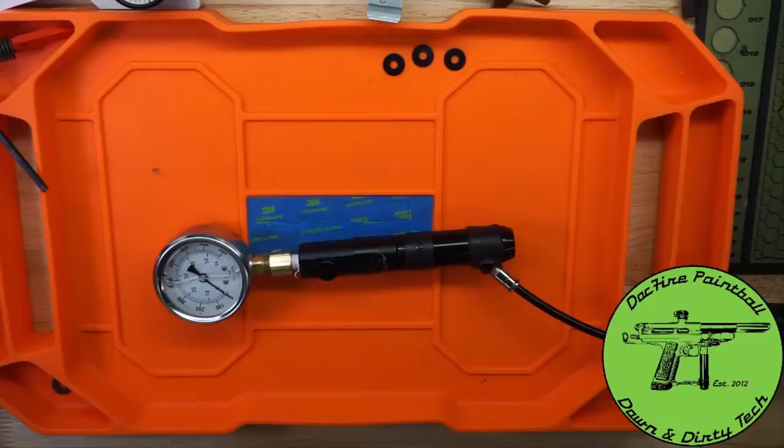I'm back with the Dye reg here. You see, these Dye regs, at least the first release of them, are being shipped with the low pressure spring pack in them. So that's what's in here right now, and I'll show you what the pressure range is with this.

I'm using a Ninja tank that's set right about 825 psi. Right now this is all the way off, so I'm at a 0. It actually has a little air going through, you can hear it. All right, so this reg has settings in it where the adjuster has stops.

So I can go from 0 and there are stops, and it's going to max out right there. I can't go any further. And it maxes out right about 220 psi if I get in there.

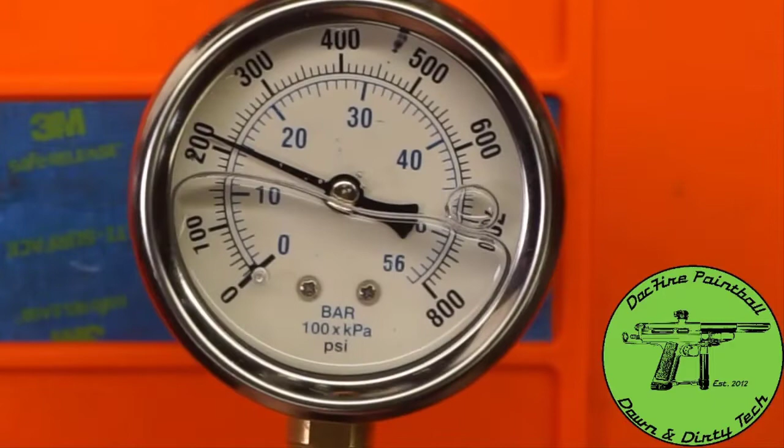Actually, let's just zoom in with the camera. 220 psi. Sorry about the oil fill, you see it refresh there. So let's back out here.

What we're going to do is we're going to change out this spring pack, all right? So let's degas it.

I'll probably fast forward through a lot of this. Take off the Dye reg tester, modified. Just pull it off the tank one down here, it's easier. All right, so we're going to take off the top cap.

Oh, and right here are the 3 factory dye Belleville springs that will make it go to a higher pressure. Let's tap out the spring pack, and I'll show you. There we go, let's set that right there.

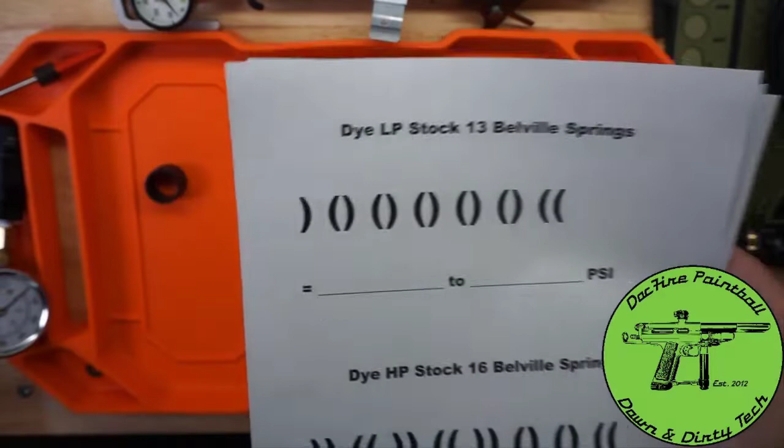Let's bring over this guy right here. So the current configuration, let me get a better pen here, goes from essentially 0 psi to 220 psi. That's approximate, every system will change a little different, but this is the current configuration.

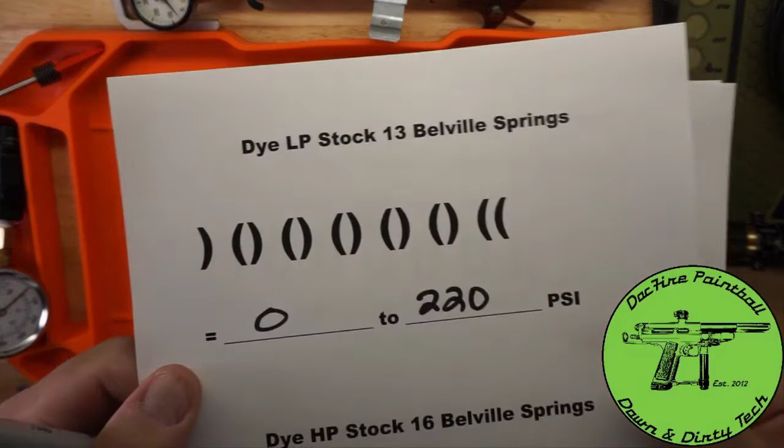This is, if the piston was in here, that's the way the piston's going. So these double stack ones at the end are towards the end of the piston, and this is towards the base of the piston, the fat end.

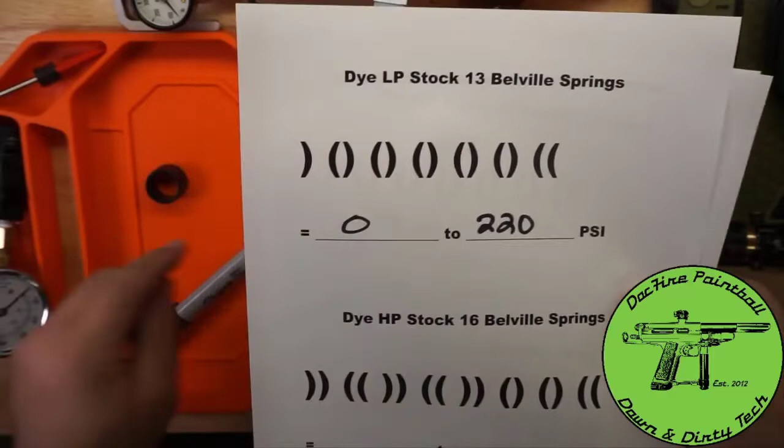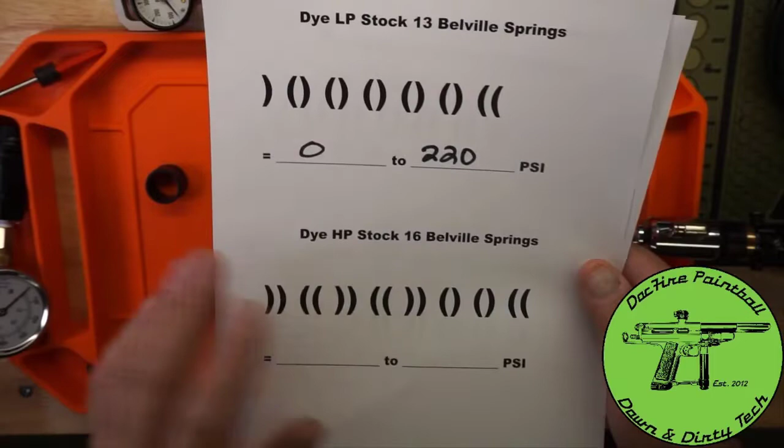All right, and there's 13 Belleville springs in the low pressure configuration. So for you to go high pressure, you need to get 3 more springs from dye, or I have another option for you. This is the configuration they need to be in, and we're going to put those in there right now and see what it comes out to be.

Let's take these springs off.

With this configuration it's about 180 psi. So we'll put 180, and we'll see what the highest pressure is. The highest pressure, let's zoom back out.

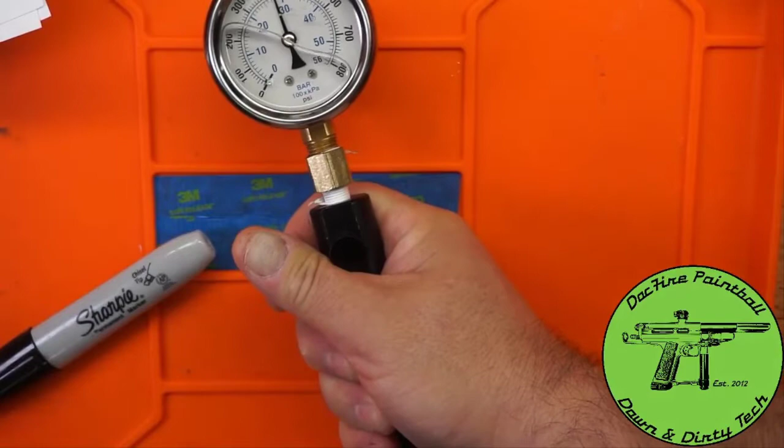I'm going to try to, that means we're going to unscrew this all the way to where it stops. I think it's going to be right around 600 psi. And I'll just zoom it in, it's easier. Sorry guys.

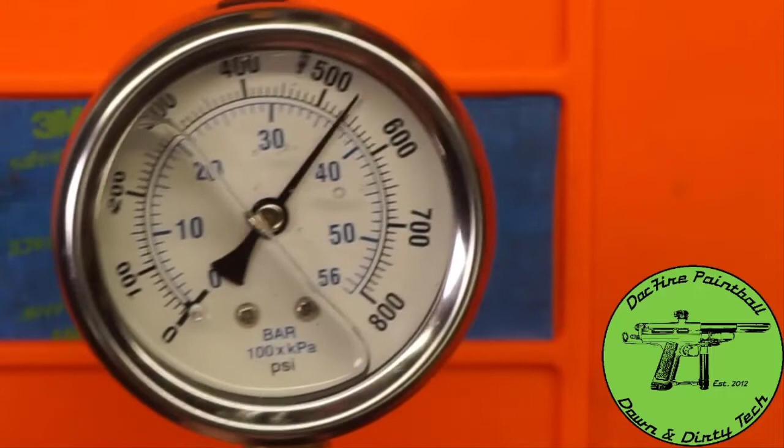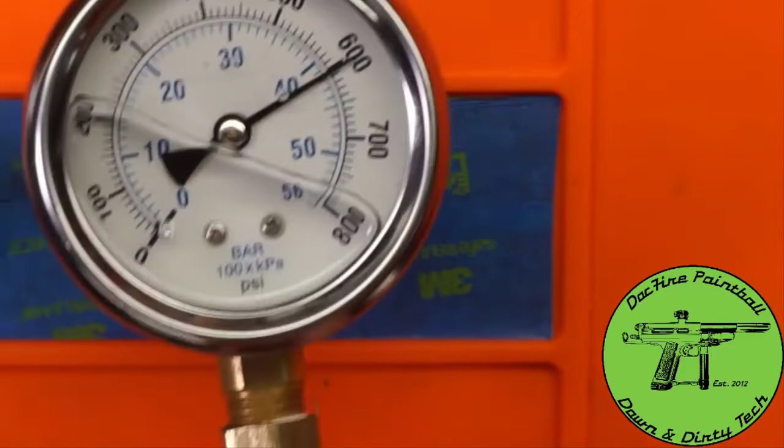And it's kind of slow at 600, that is a really slow response. So, and I like when I'm lowering the pressure, I like to degas it a little bit. It's a little bit easier on all the components.

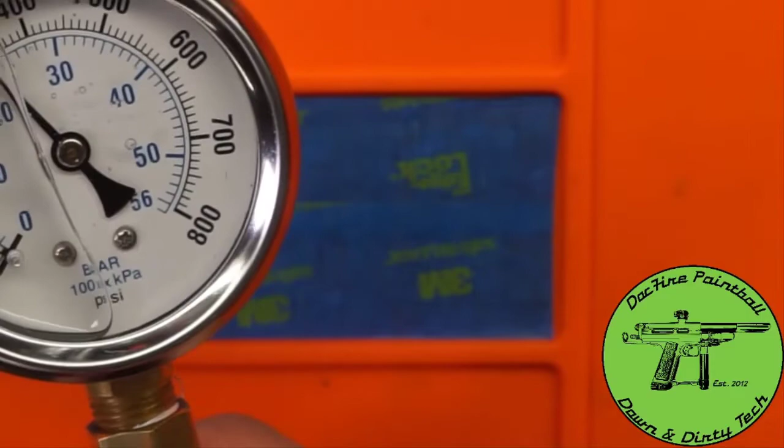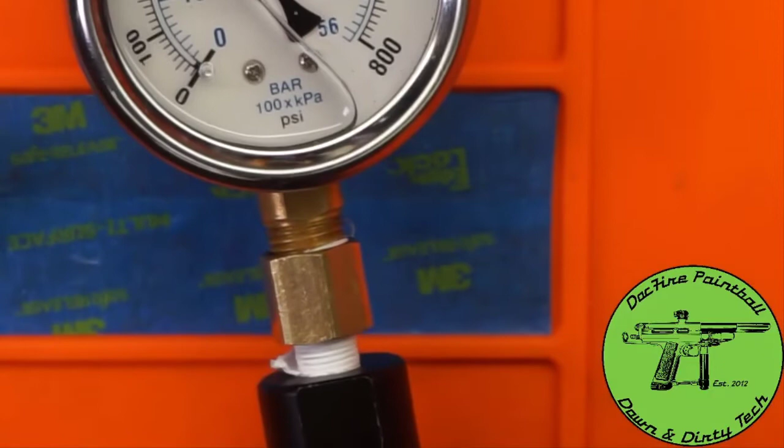But let's say right around that 350 range, that's where a lot of the free flow markers are going to be, give or take. It's reasonably fast. Now this is an oil fill gauge, so you gotta be cognizant of that, that's that oil fill gauge.

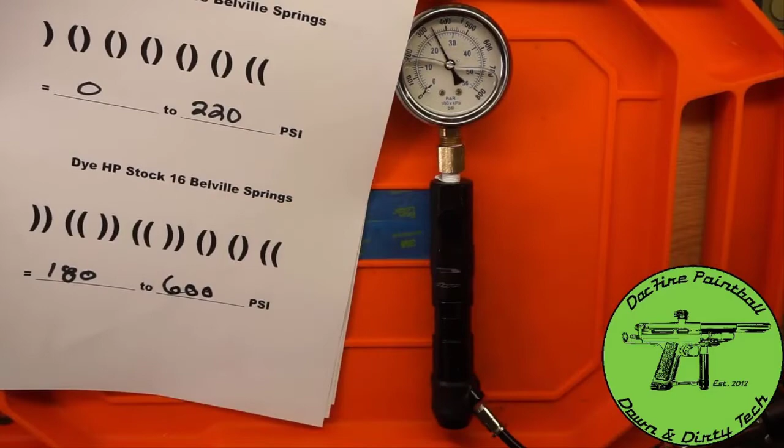So that's the high pressure version. I said it went up to about 600 psi, maybe a little bit over. We'll say 610, we'll just say 600, because the reality is most markers out there are either going to run in this range for low pressure, or this is 180 to 600, and the middle range between 180 to 600, let's say 200 to 600, is right around 400 psi. And so that's the medium range on it.

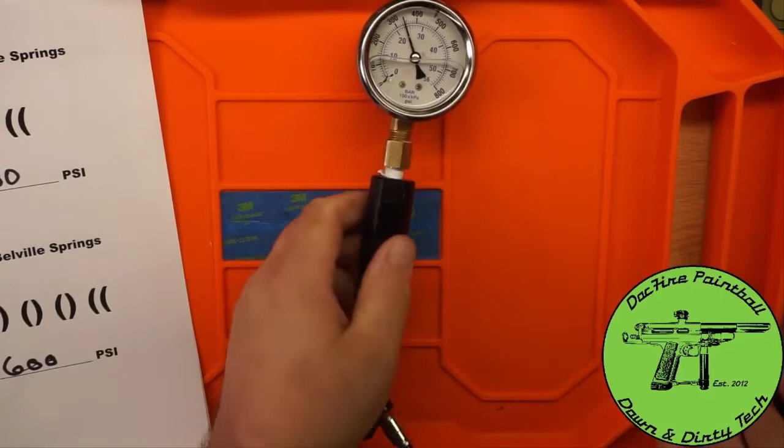So let's see with another option out there. We're going to unscrew this, we're going to degas there, pull that off. We're going to zoom out.

And what I have is a set of DocFire custom made in the USA Bellevilles. And I spec these out, they're special.

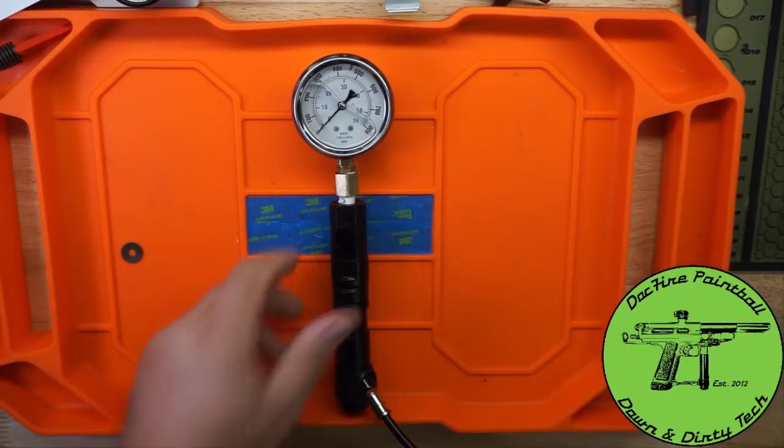Buy these from a US company, and it's not McMaster-Carr. You guys can go buy them off of McMaster-Carr, and good luck. I've tried it - they are different specs, a lot different, so I don't buy from it. McMaster-Carr has great stuff on it, but I don't buy a lot from there anymore. I'm finding that I can go direct to different companies and they have a lot more options. McMaster-Carr really has the standard sizes of things, and not the other sizes. So we're gonna knock this out.

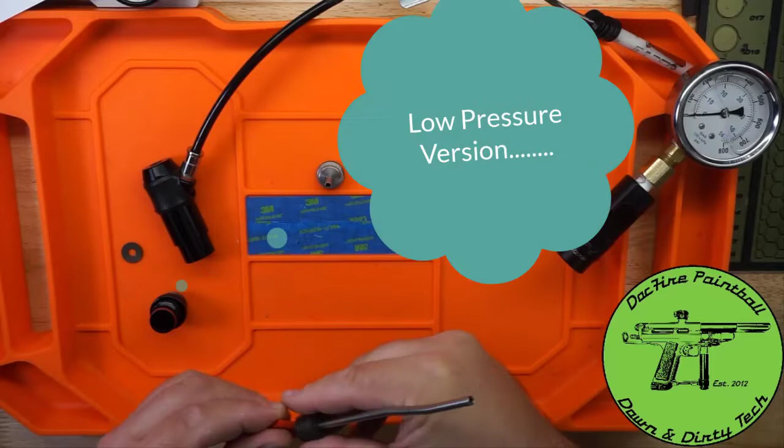We're gonna pull this stack off and put it on a screwdriver so I have it here - I could probably measure a little bit easier that way. We'll set this off to the side, and we're going to put on the DocFire spring stack. So this spring stack right here is 2, 4, 6, 8, 10, 12, 13 discs, in the same configuration as the low pressure version of the Belleville spring. So it goes - we're going to stack these on here, right? And let's do these guys right here. So that's these guys. So we're going to say these are the ones that, I'm going to draw this out.

It's going to be the same as stock - same as stock, 13. Okay, and we'll see what the pressure is on this. So, okay, this one all the way - sure, it's all the way down. Yeah, it's all the way down. We're going to zoom in here.

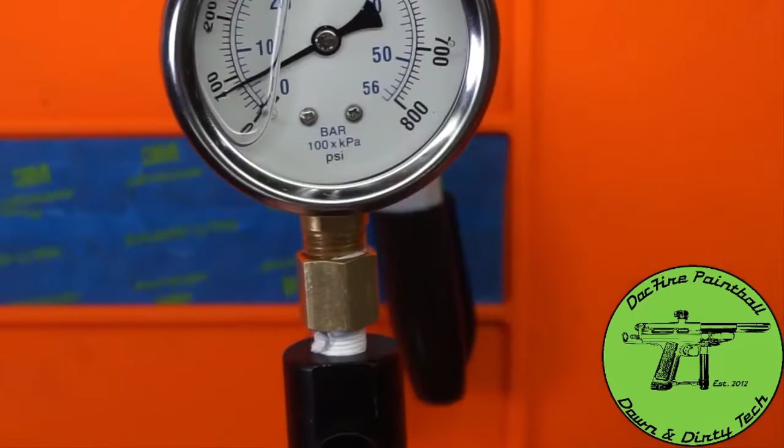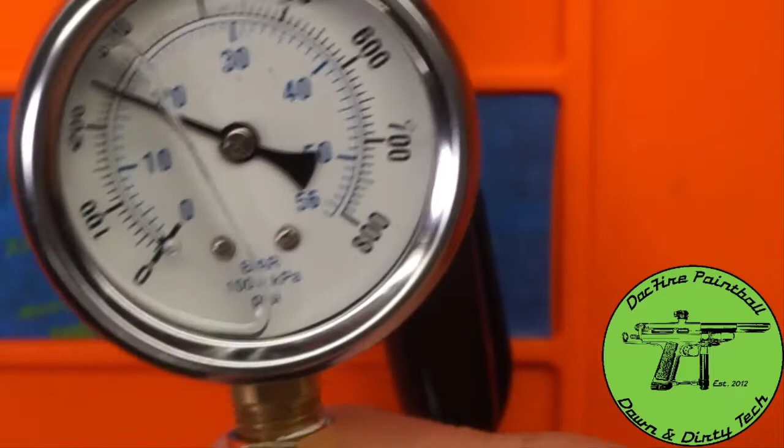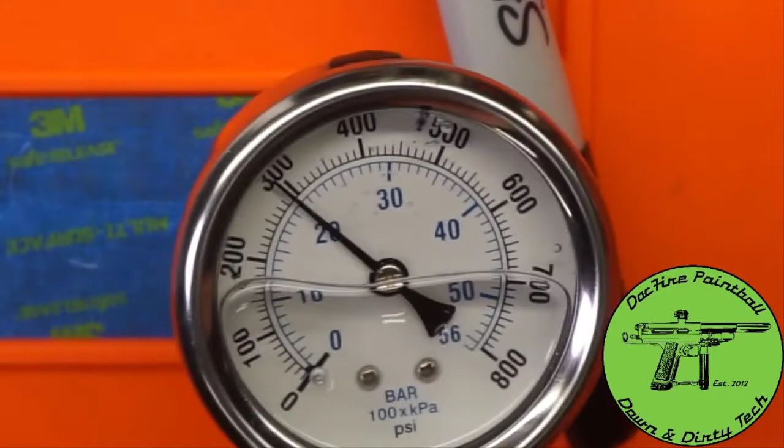So this one, I start at the lowest pressure, about 80 psi, 75 to 80 psi. Okay, and now we're going to slowly raise this up. I like to cycle it every once in a while. And we're going to go up, keep going, right there. So it maxes out right at about 340. So 75 to 340. Let's look at how fast it is. It seems a little fast for me, but I don't know - it's always hard to tell on these gauges. But we're going to say 75 to 3... ah man, we're 345-ish, 340. We'll just say 340.

Take the 13 out - I could add a 14 to it, but I don't want to on this one. I'm just going to take this stack and put it back onto here so I don't lose the configuration. Set over here. Now this configuration, let me get the little stack holder. I got one over here. I don't... here we go. This configuration is kind of close to the configuration that we did on the 16, but we're only using 14.

Okay, I want to find a happy medium. I really think that most stuff out there, most autocockers and most things out there, anything above let's say 450 psi - yeah, there just isn't a lot out there that's running that high in the autococker world. And most of the stuff where these markers or where these regs will be used. So this configuration is, I have two cupped - my first two are cupped like this, and then from there I have another set cupped like that. So let's draw this out. Get my pen here.

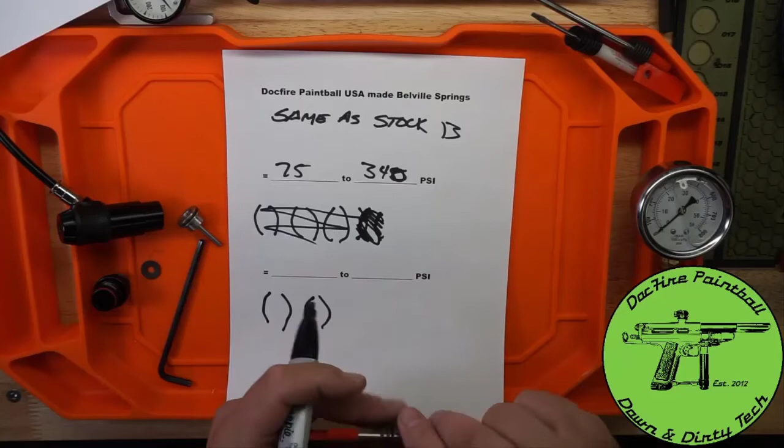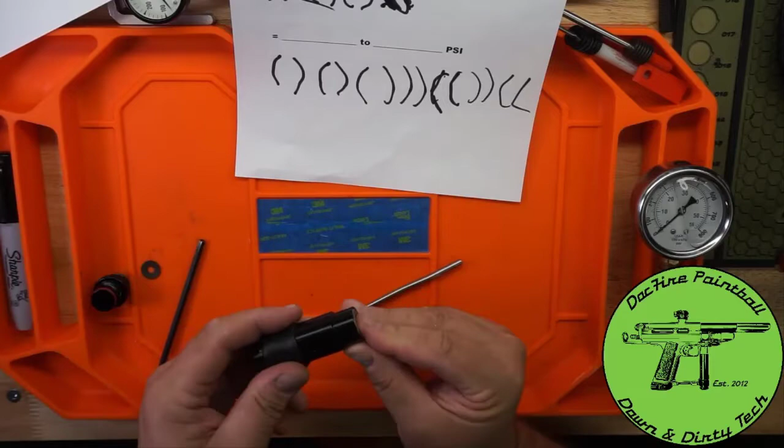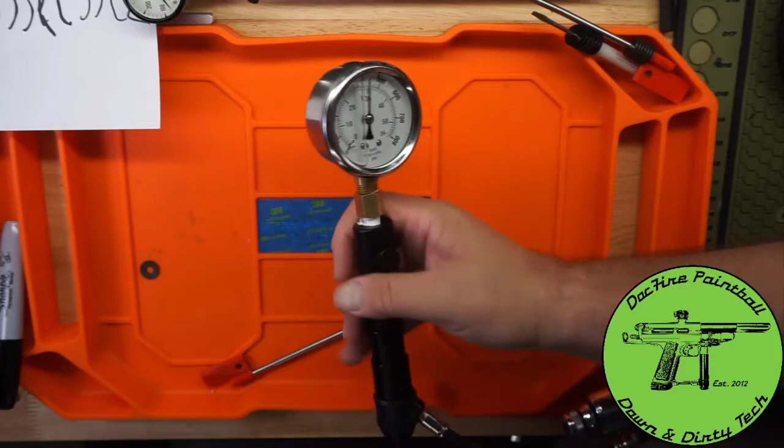I think this is a configuration that worked well. I did this last night and I set this off to the side and watched it to prove me wrong. So this is 14, 14. So let's start backing it out. 0. 450. Now let's back it all the way out. Let's zoom in for you guys. Pretty fast at 450, so let's start.

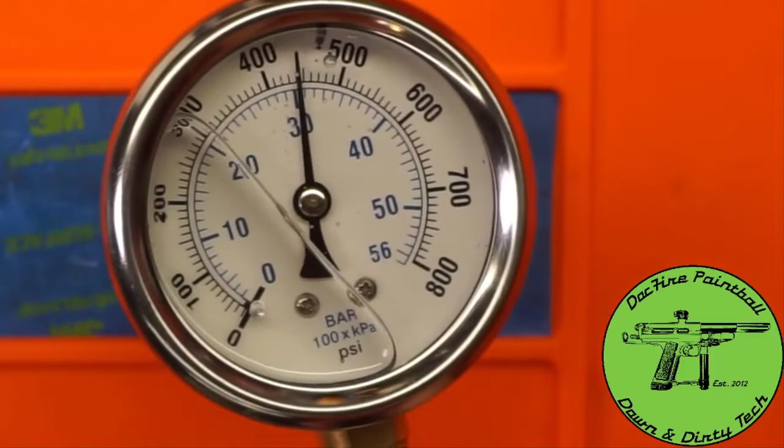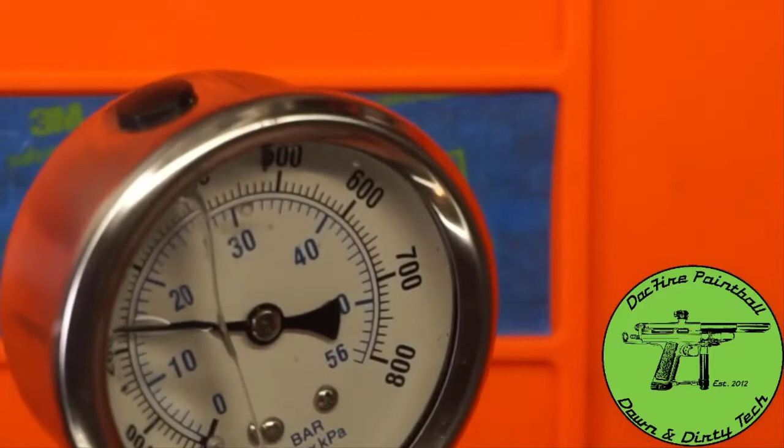Okay, let's go right around 350. That's right. There we go. So let's keep backing, screwing it in. Let's go around 250 - really likes that 250 range. So that configuration, I have to draw it out again, is from - let's zoom out here, we're from about, let's make sure we're at 0. Let's back it all the way out, or screw it all the way in, excuse me. Back the pressure all the way down.

It's maybe about 5 psi at the bottom, if that, but we'll call it 0 because it's really a big goose egg. 0 to 450.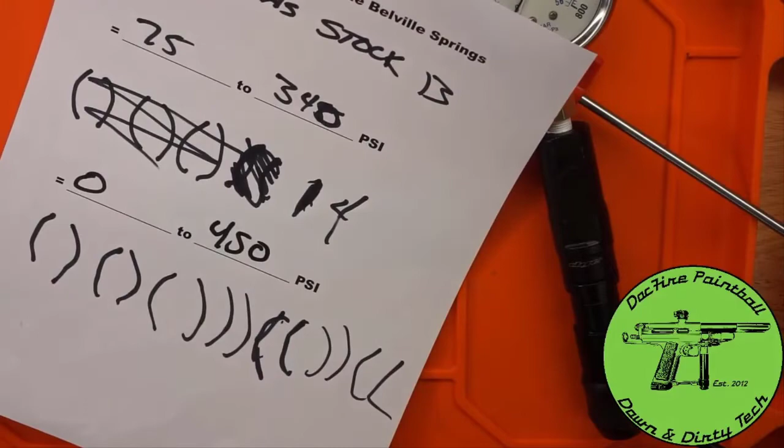All right, so let me draw this out a little bit better if I can. That disc over there - that's one option you can do. So I have 1, 2, 3, 4, 5, 6, 7, 8, 9, 10, 11, 12, 13, 14.

Now in here, this is a triple stack and it's fine. So what this does is when they're cupped towards each other in single stacks, it's rated at whatever they rate this spring individually. When you double stack them, it essentially almost doubles that spring pressure. And when you triple stack it here, it's going to even increase a little bit more.

And so the whole thought process on this is I'm probably not moving these at all. This is probably just like a giant spacer in there, and this is getting me to the right length on the shaft.

So if I were to look at these guys, all right, so I'm going to try to put them right next to each other. These guys are probably - this is my stack, this is the factory high pressure stack. This is probably maybe a spring.

I could probably add one more spring to this, which we're going to do. We're going to add a 14th spring to this, okay, to see what options we have with it. And we'll do that on the next round. We're going to add this last spring, which is right here. I got it. We're going to add a 14th, and it's going to be opposing.

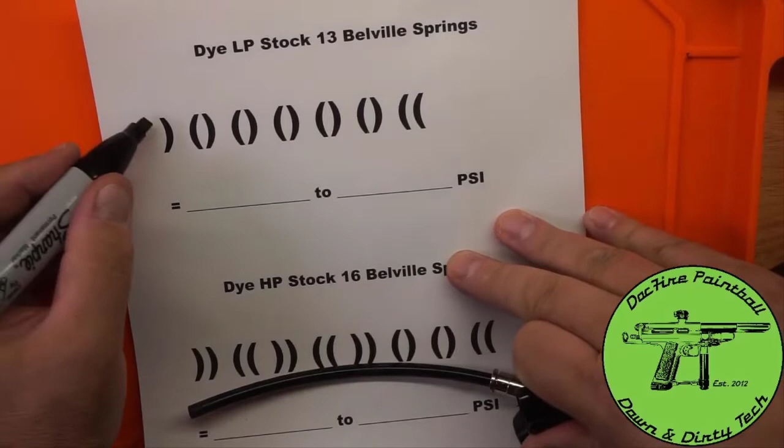We're going to basically say same as stock, but what I did is I added a 14th spring right here. So this is the stack I'm putting in. And so we'll say not stock, we'll say Docfire 14.

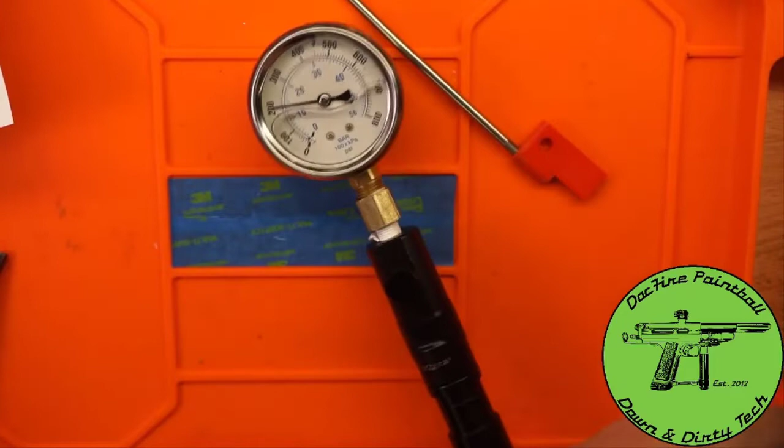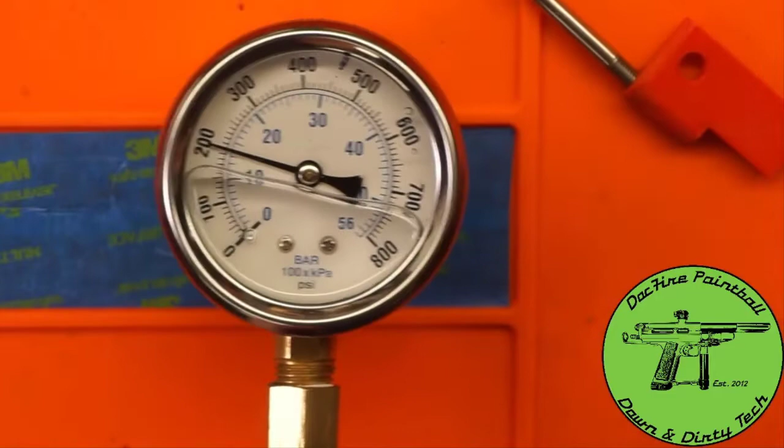All right, so let's see what that does. Okay, this one, I'm right at 200. Sound familiar? At the lowest pressure, 200. We could look at how fast it responds at 200. That's by adding just one spring. Really fast.

I'm going to go up to 350. Okay, the 350 rate, fairly quick. Now these are US made springs.

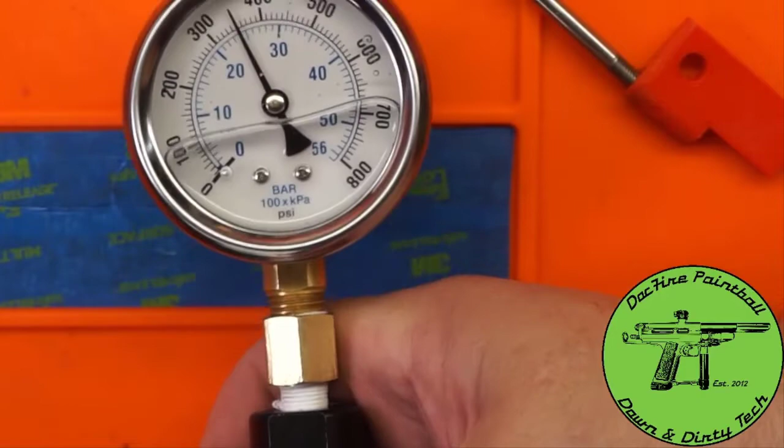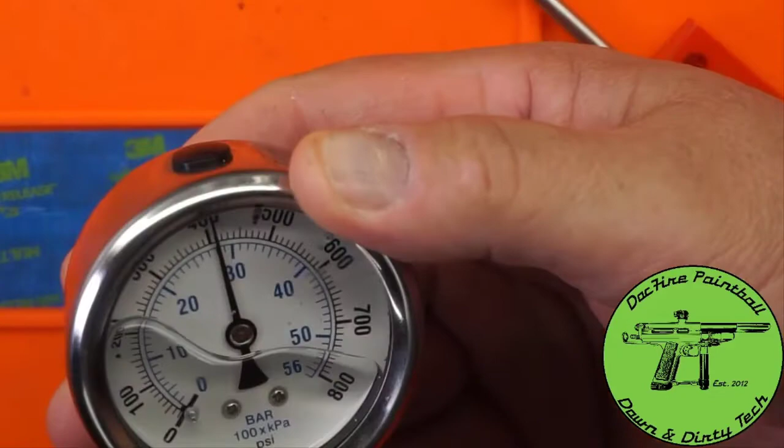Okay, so this has a 200 to 400 range. Probably a little over 400, probably a 420 range. So 180 to 420. Let's drop it all the way back down. That's where we are with this.

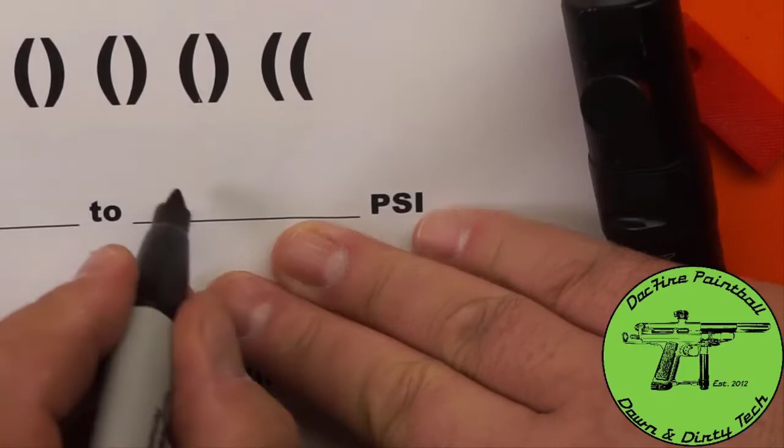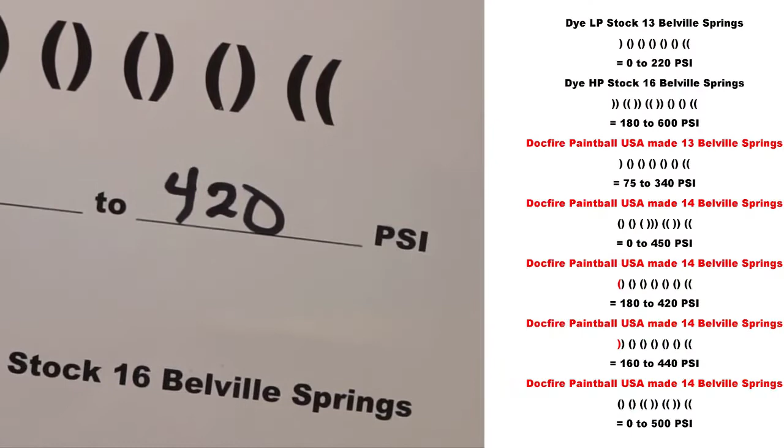Good range. So 180 to 420 on that. And that's with putting in the 14th in the Docfire spring setup. So let me zoom out. So that's with putting in the 14 in the Docfire spring setup.

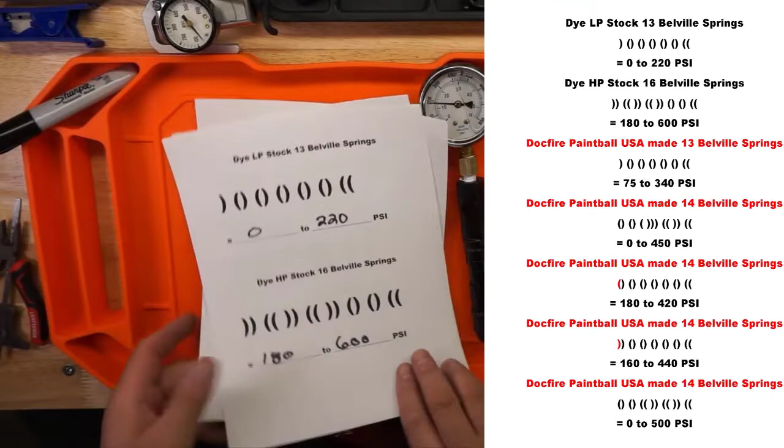So we take all of our stuff here. We start with Dye's Original, and if you have a gun that runs within this pressure and you're using this reg on it, keep with this. Okay.

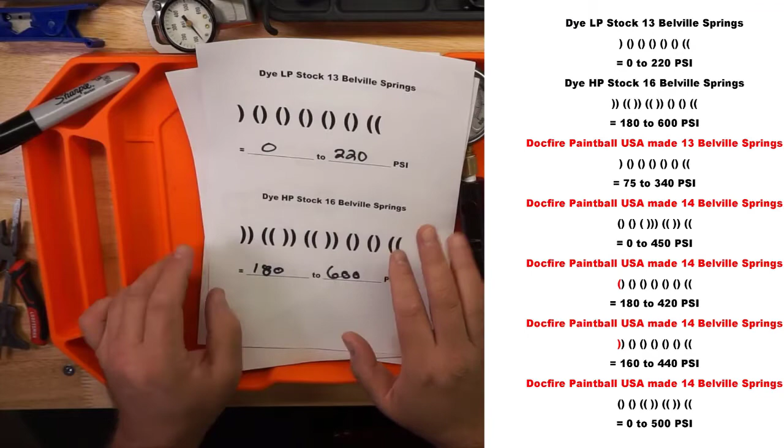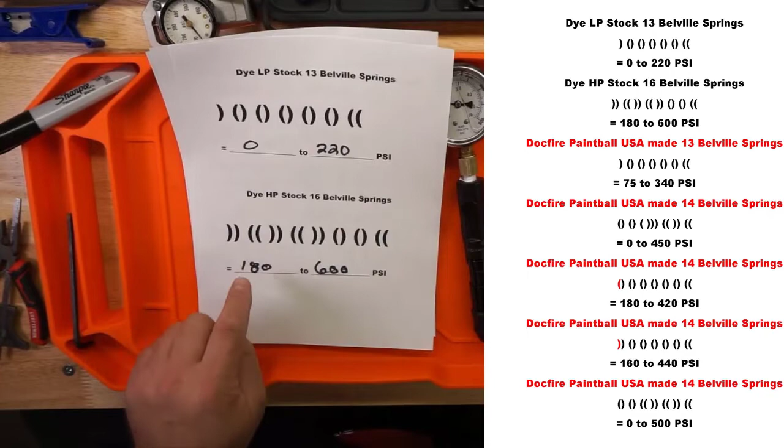If you get the 16 springs ones, if you're doing that, or if you don't - right now I don't know if they're selling these, maybe here in the future. If you hit the 16 spring, you're going to have a 180 to 600, which is pretty good range, right? It's actually a decent range on it. I'm not gonna lie, it's good.

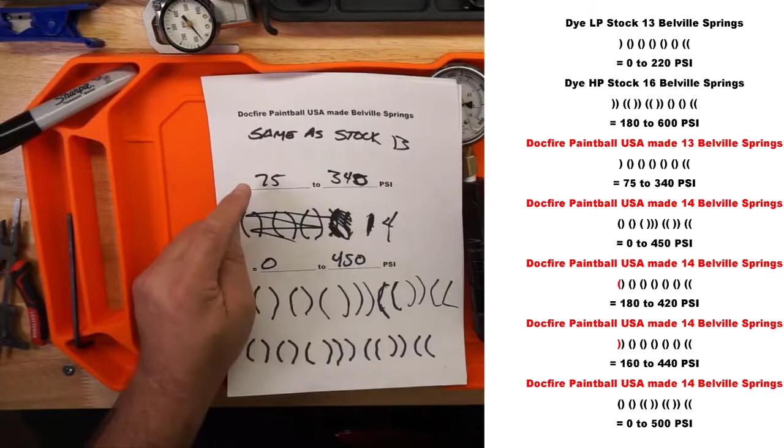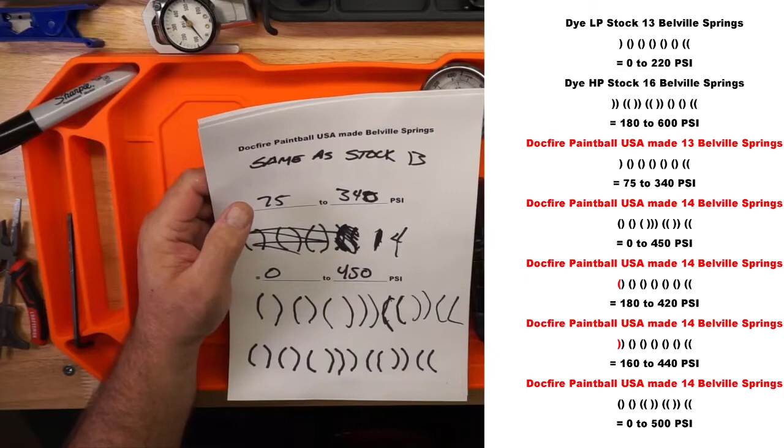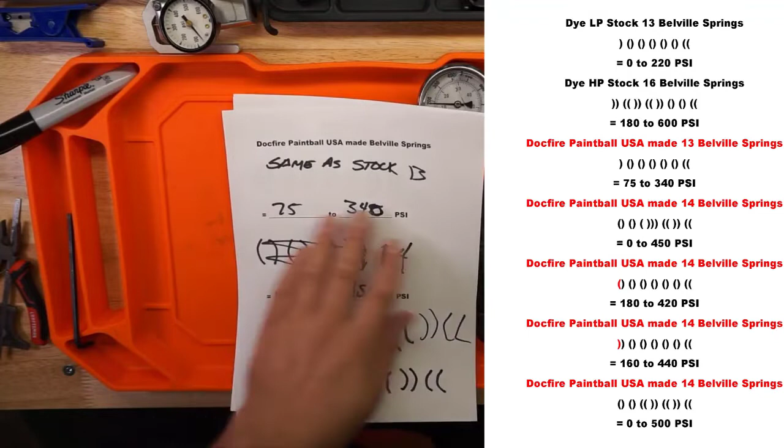And so then, if we use my springs, the 13 spring combo is 75 to 340. So this will probably be good for, let's just say, 100 to 300, that's 175 to 200 PSI, give or take 180. This is that Merlin, that low pressure stuff. It'd be good for that with my springs.

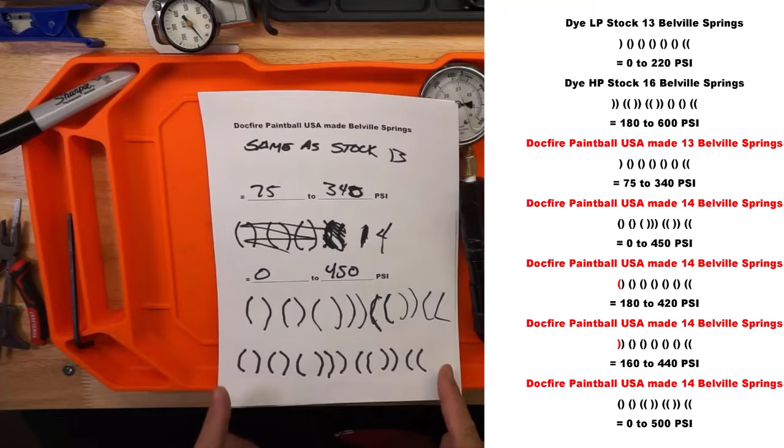If you do the giant spring stack, which is 14 springs - that's what you're going to get in a kit for me - 14 springs in this configuration, you're going to be 0 to 450. All right, so you have a big range there.

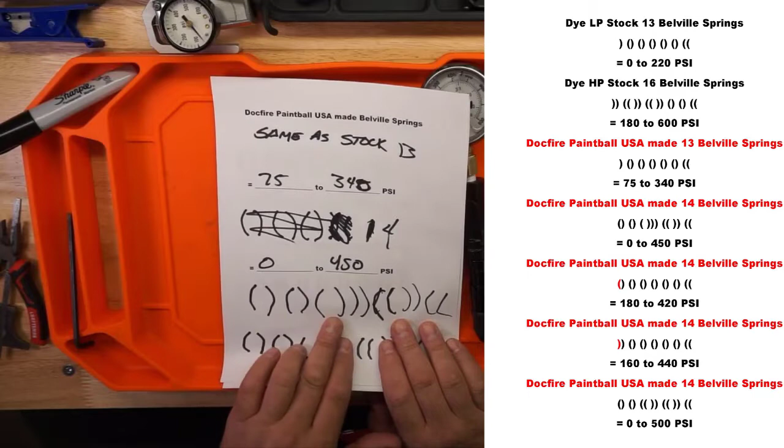Now the reality with this is what I'm doing here is these 3 center ones are basically acting as a spacer. So I essentially have 1, 2, 3, 4, 5 springs that are standard spring rate, and then I have 1, 2, 3, 4, 5, 6 springs that are dual spring rate. And there's a name for it - if you go look up Belleville Springs, the company, they talk about this configuration.

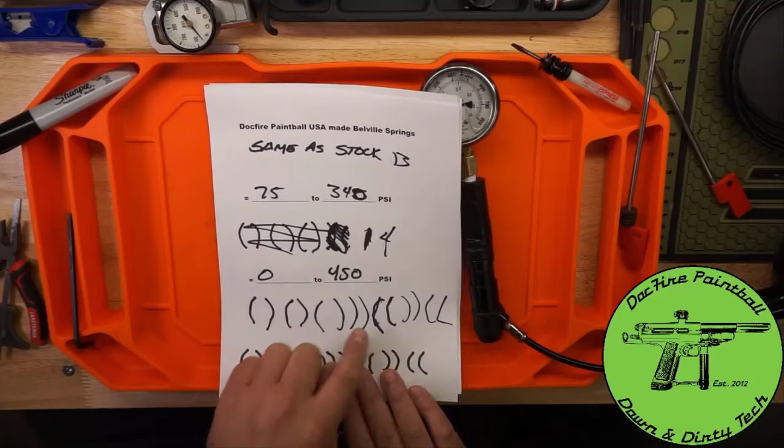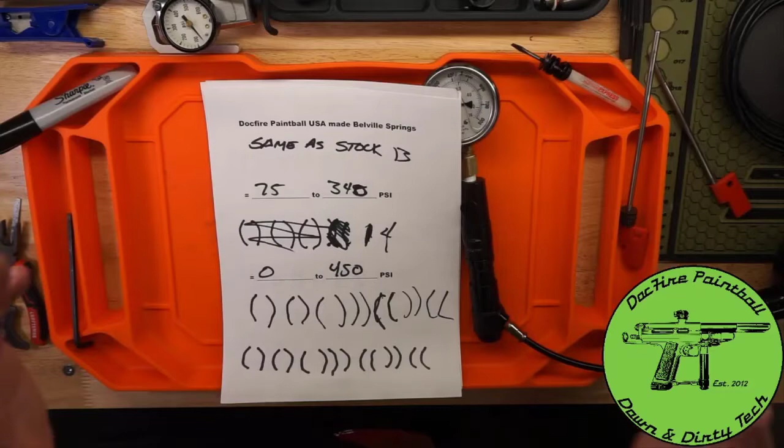Basically all of the configurations are dual rate setups. So these springs will collapse faster than these, and these will come in later. It's almost like a dual rate spring on a car suspension—nice and soft to take up the soft bumps, and then as it goes down, it absorbs a bit more energy and stiffens up a little bit.

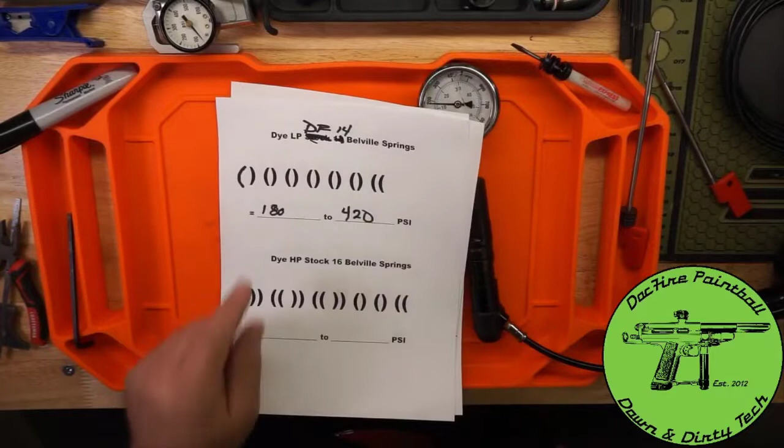So anyway, 0 to 450 with that, and then finally we have the Docfire 14 spring, which is the stock configuration, adding a 14th in the standard manner, and we get from 180 to 420.

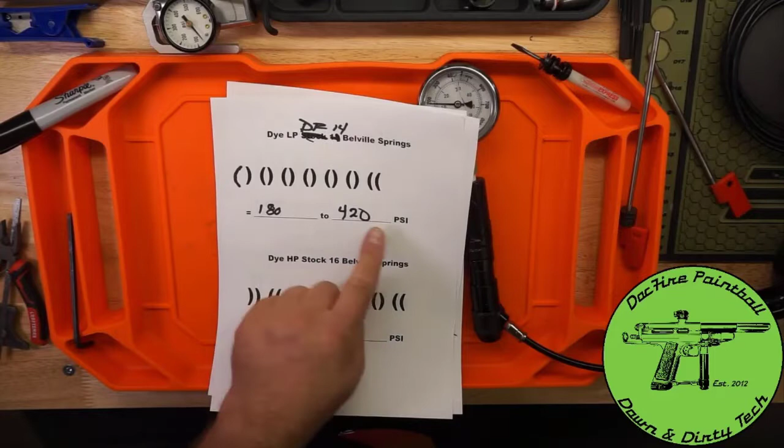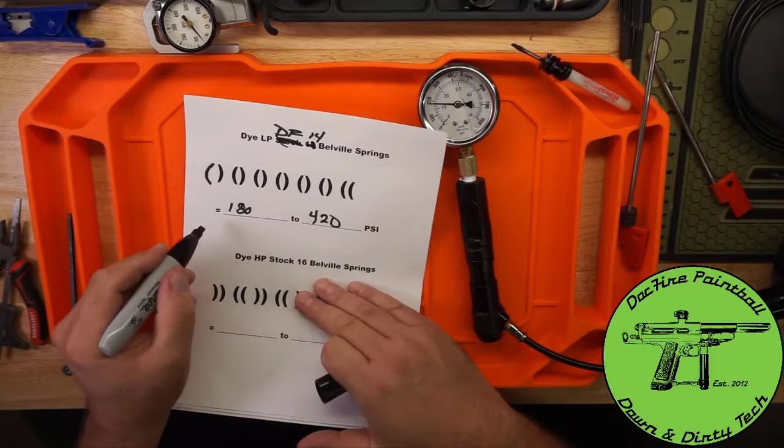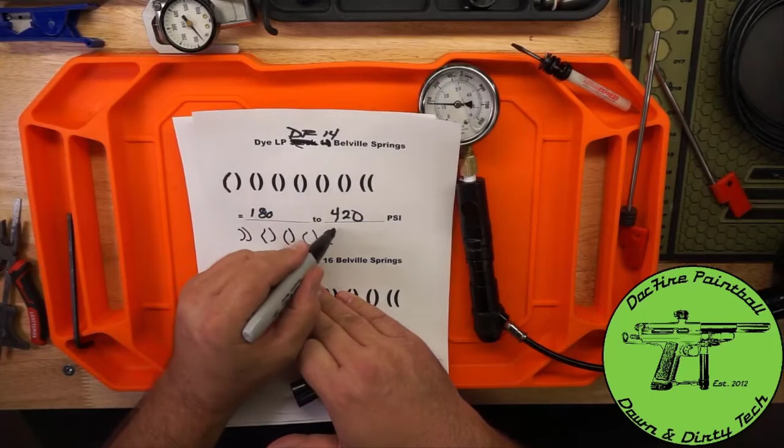It'll be interesting to see if we take this and invert this one spring, to see if we can raise this pressure at all. Let's do that as the final one. So instead of this, it's going to be bop, bop, then 1, 2, 1, 2, 1, 2—there should be 5: 1, 2, 3, 4, 5, 1, 2—and then we're going to try that. There'll be a lot of different configurations you can do, but we'll see what this pressure is.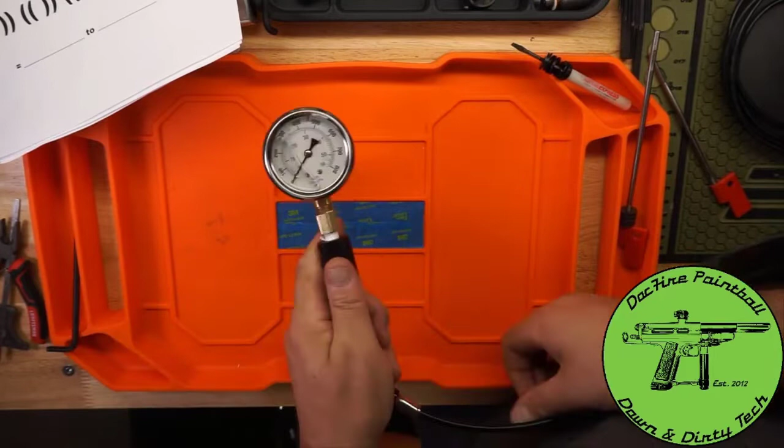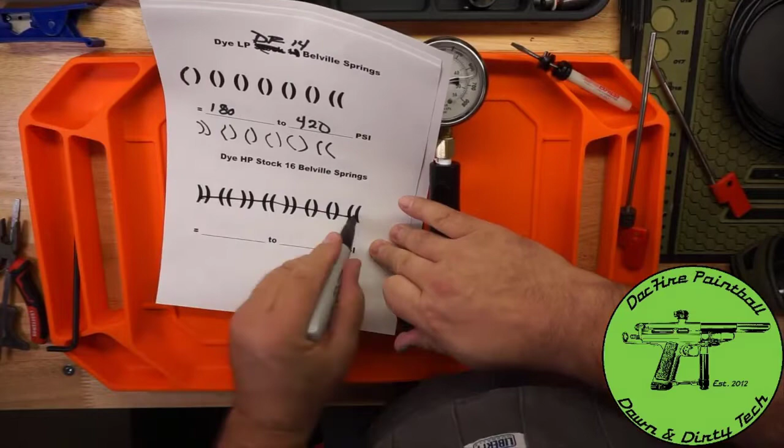All right, so this is interesting. I start off right about 160, so I'll write that on here—160. I'm going to cross this out. So, 160. You guys look at this.

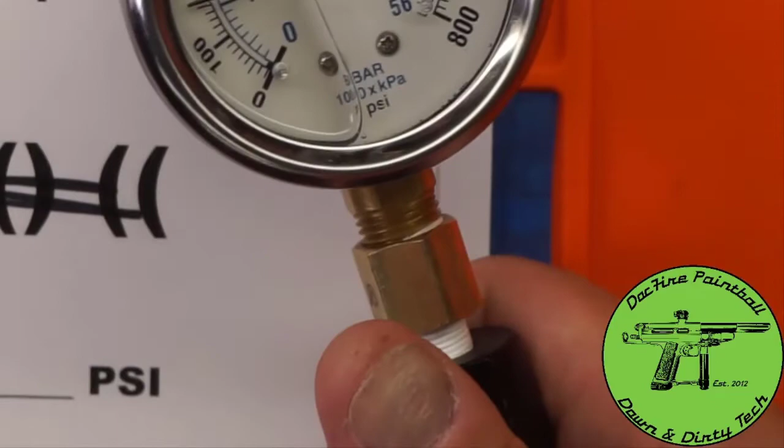Really fast at that lower range, huh? 160... 250. Pretty fast, let's keep going. We're at the 350 mark. Pretty fast—I think I like this one the best. This is probably the best configuration.

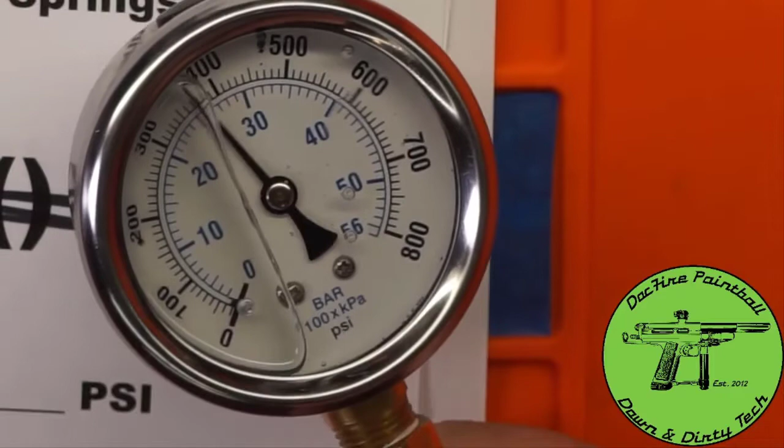All right, so we have the full range from 160 to 440.

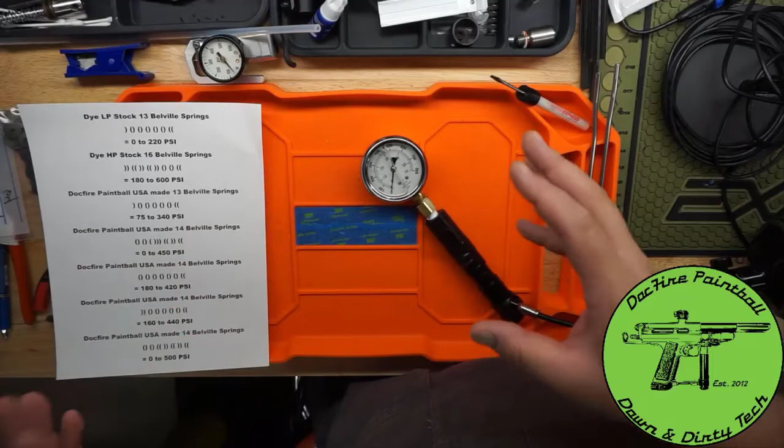All right, so I'm here for our final wrap up, and I'm adding this video on to the other one. I'll probably mention on the other one that I'm adding this on because I did one more configuration. So let's go back to the configurations real quick.

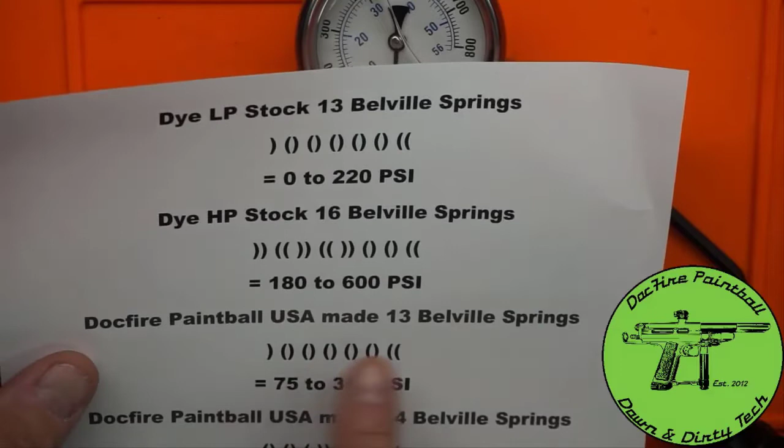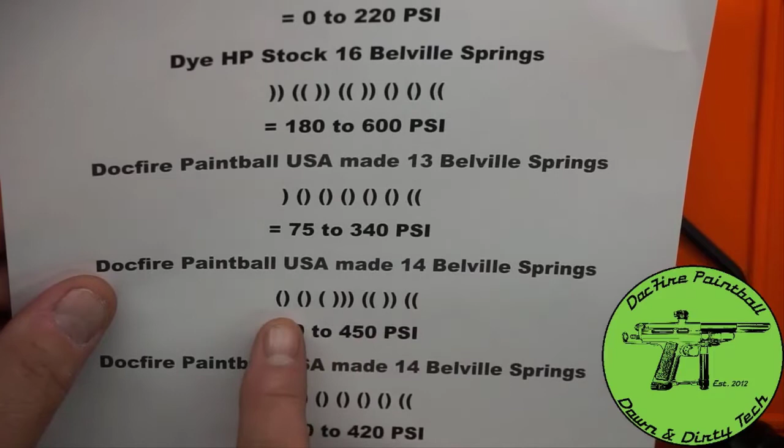Let's zoom in here—up too far. Okay, we have the stock configuration, which is 0 to 220. We have the stock 13 Belleville springs. The stock 16 Belleville springs is 180 to 600 psi. Then you have the Docfire Belleville springs made in the USA, 13, stock configuration is 75 to 340. Then we have the Docfire 14 Belleville, which basically added the 14th onto the end there, 0 to 450. This is a nice range here.

Then I made a little change to that configuration. I had 180 to 420, kind of changed where the middle point of that was. Did a third configuration of it, and this is a 160 to 440—this is still 14 springs, and I did a fifth configuration.

Basically, I took my 14 where I had this triple stack here—you see that triple stack there? It was really just acting as a spacer, and I converted that—I just flipped it around. Oh, there we go, I just flipped it around there. So it was a triple stack here, and basically I made it double, double, double, double, double—so 1, 2, 3, 4, 5 of these are double the spring pressure, and then 2 or 4 of them, whichever way you look at it, are the standard spring pressure.

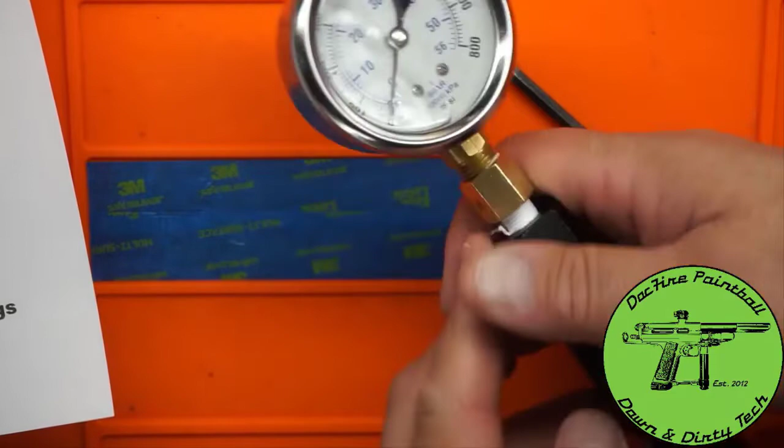And this configuration, which I have in the system right now, is a 0 to 500. So right now we're at 0, and I'm going to zoom in a little bit so you can see the pressures. 0, we're going to start cranking this out. We're going to go up to that about 220 mark.

Very fast. We're going to go up to that 320 mark, 340. Still fast—there's the 350, that's 320 to 350. Still fast, we're going to go up to 450. Starting to slow down a little bit. It tapped out at 500. So this is from 0 to 500.

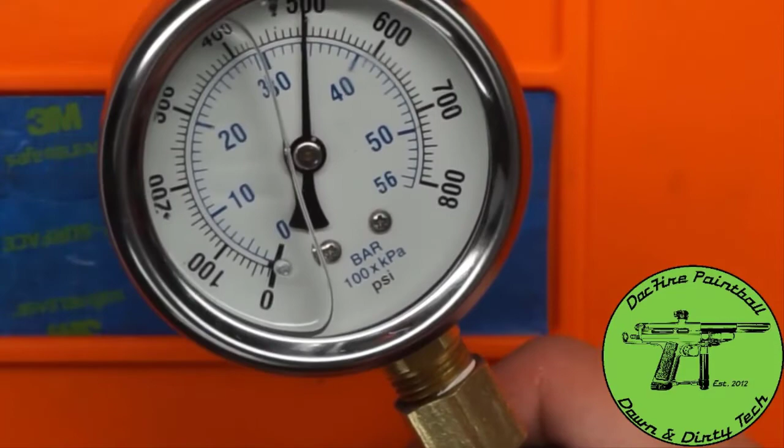I kind of like this configuration the best. So you have these options—you'll get the build sheet to decide what you want to do, you'll get this sheet right here, it will be included, and you have some options out there. I like the last one, that gives the most variance. But you don't have to do that one—I think it's the quickest. So anyway, that's it. Docfire.